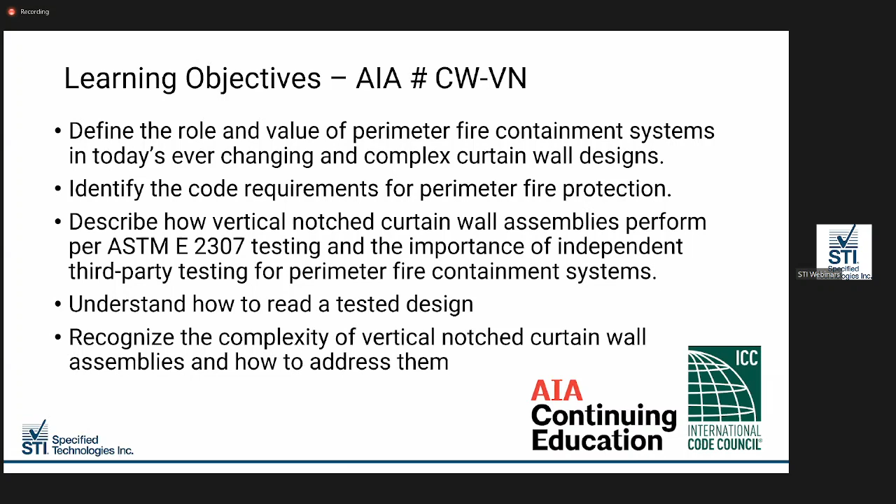And with that, I'd like to turn it over to our presenter today, Mr. Eric LaCroix. Welcome, Eric. Thank you so much, John. I'd like to welcome you to today's advanced curtain wall training and thank you for the opportunity to speak with you. As mentioned, my name is Eric LaCroix and I will be your presenter today. I'm the Director of Strategic Accounts for Specified Technologies Incorporated, overseeing the curtain wall division, and I'm considered the Firestop industry's curtain wall specialist. Just a little background before we begin.

STI is a privately held worldwide manufacturer founded in 1990 and is the technical leader in the firestop industry. STI's corporate headquarters are located in North America with regional offices in Europe, Middle East, Singapore, Latin America, India, and the Far East and China. We are the only manufacturer with 100% focus on the firestop industry, and our mission is simple: to provide the most innovative and cost-effective firestop solutions.

Today's presentation has been developed from overwhelming requests for the latest advancements in testing for vertical notch curtain wall systems and is designed to assist you in avoiding headaches and delays down the road that cost you money. We will have time at the end of today's presentation, as mentioned, to answer any questions you may have, so please feel free to ask.

Our discussion topics will cover the evolution of code consistency, the importance of testing for perimeter fire containment systems covering ASTM E2307 and the ISMA, in addition to understanding how to read tested systems. We'll also cover understanding the complexity of vertical notch curtain wall designs, focusing on both traditional galvanized backpan assemblies, as well as the newer galvanized valance backpan assemblies. We'll also provide an STI update, and again, we'll have time at the end for questions.

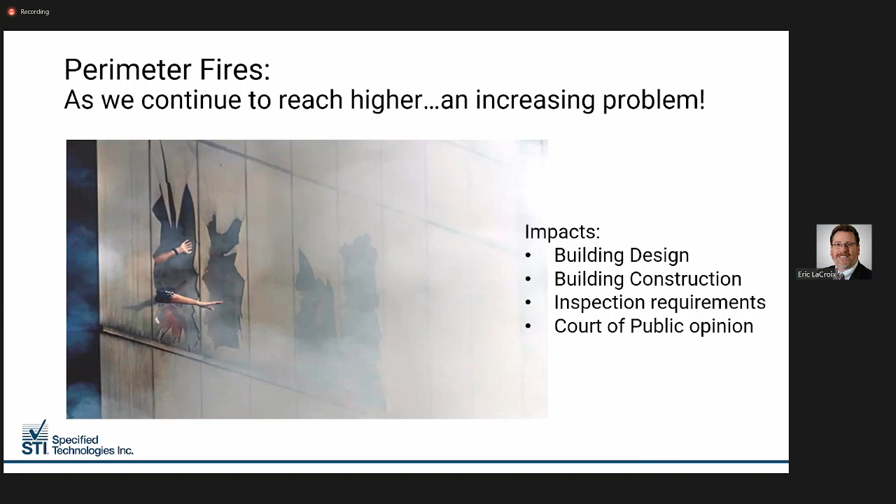The starting point is to always have a solid understanding of the code requirements. And the great news is the codes have finally established consistency, starting with the 2012 IBC and continuing with the adoption of the 2015 and 2018 IBC codes. State building codes have also been adopted, incorporating the IBC verbiage to supply a consistent message across the country.

Protection of the void created is mandatory in all building codes, period. The IBC documents specific language to outline the requirements and further eliminate confusion.

Section 715.4, exterior curtain wall floor intersection, states voids created at the intersection of the exterior curtain wall assemblies and the rated floor ceiling assemblies shall be sealed with an approved system, not materials with known fire resistance properties. These systems shall be securely installed, in other words mechanically fastened in place, because simply friction fitting the insulation and taping to the frame will not pass the test standard.

These systems must be tested in accordance with ASTM E2307, which we'll cover in detail shortly, and they are required to provide an F rating equal to that of the floor or roof deck itself. That is the code requirement.

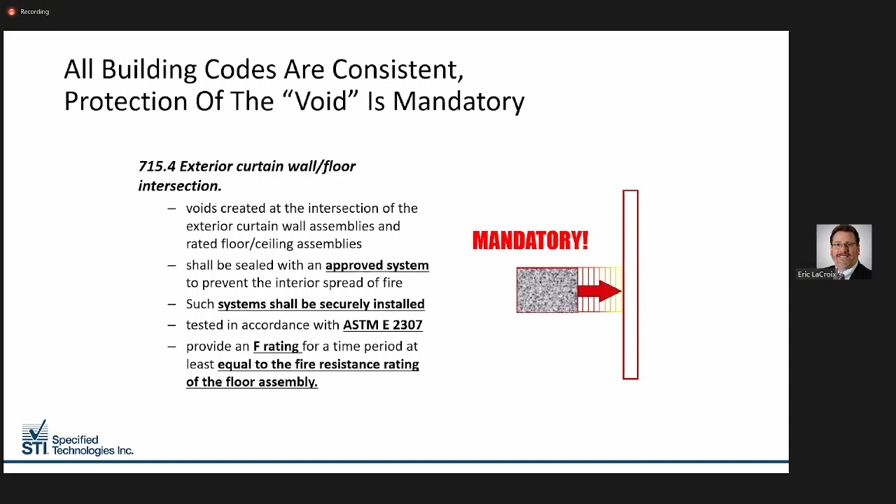In addition, Canada has finally adopted the ASTM E2307 requirements into the 2018 S115 Canadian Code, and the language has also been incorporated into the 2020 NBCC, which was targeted for release December of 2021. The release of all the updated codes has been delayed due to the COVID pandemic, so we are staying on top of the release of those codes on a monthly basis.

So let's discuss the importance of testing for perimeter fire containment systems, focusing on ASTM E2307 and the ISMA. And again, we'll also review how to read tested systems.

All perimeter fire containment systems are tested to ASTM E2307, which is the standard test method for determining fire resistance of perimeter fire containment systems using the intermediate scale multi-story test apparatus, commonly referred to as the ISMA. This is a very severe and critical test to pass, and it differs in three critical ways from how standard construction joints are tested.

First, this test is run between a rated floor or roof barrier and a non-rated exterior curtain wall assembly. Every other construction joint in the fire stop industry is tested between two rated barriers - a rated floor to a rated floor, a rated wall to a rated wall, a rated floor to a rated wall, and so on. This test requires a non-rated exterior wall to a rated barrier - a different test standard.

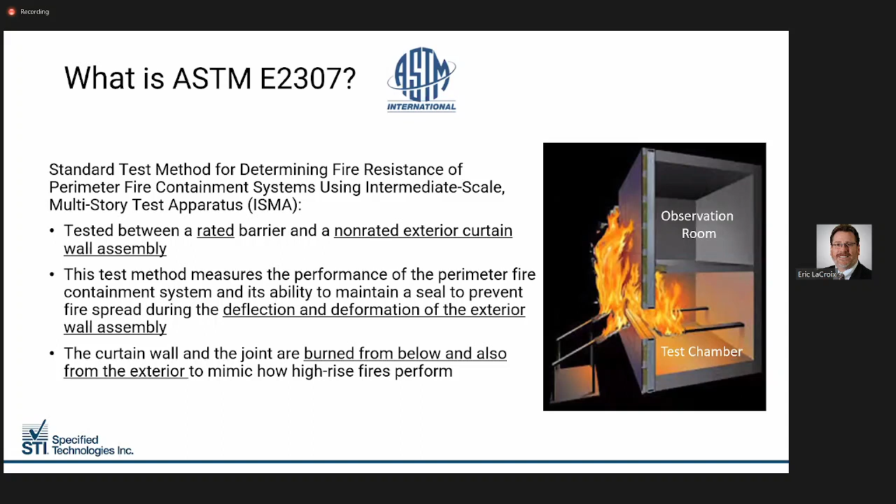Compartmentation is really nothing more than dividing space into smaller units through construction of rated boxes, designed to limit the spread of fire and toxic smoke and gases to their point of origin. This allows occupants to get out and first responders to get in, which is critical in fire protection for life safety.

But in curtain walls, structural integrity is also critical, because if the wall comes off the building, the joint goes with it. We must protect the components of a non-rated curtain wall system as long as possible to be successful.

The fire will attack any unsealed voids at the floor line on the interior side while breaking out the vision glass on the floor below. The fire will then attack the framing system and spandrel or closure panels from dissimilar planes, from both the interior as well as the exterior of the building.

Combustibles on the floor will ignite, occupants will perish due to smoke inhalation, and in the worst case scenario, both compartmentation and lives are lost.

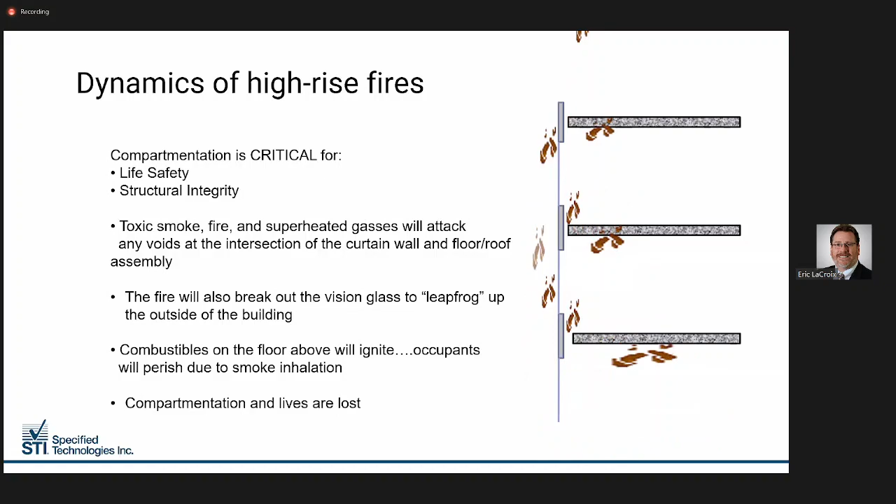So let's take an in-depth look at the ASTM E2307 test requirements and the ISMA.

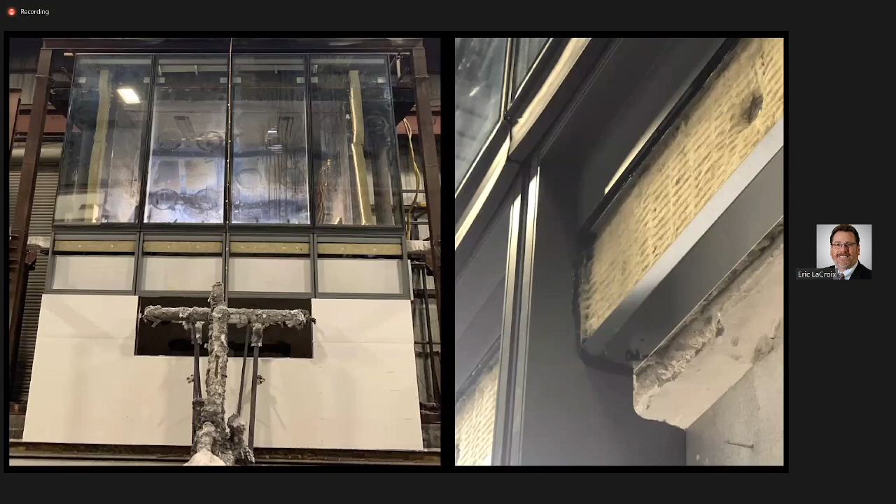Here we can see a recent full-scale ASTM E2307 test on the ISMA. On the left, you can see the size and scope of the test that was run, while on the right, you can see the galvanized back pan assembly in relation to the floor slab itself.

And here you can see the internal burner igniting at full intensity at the very beginning, at the start of the test.

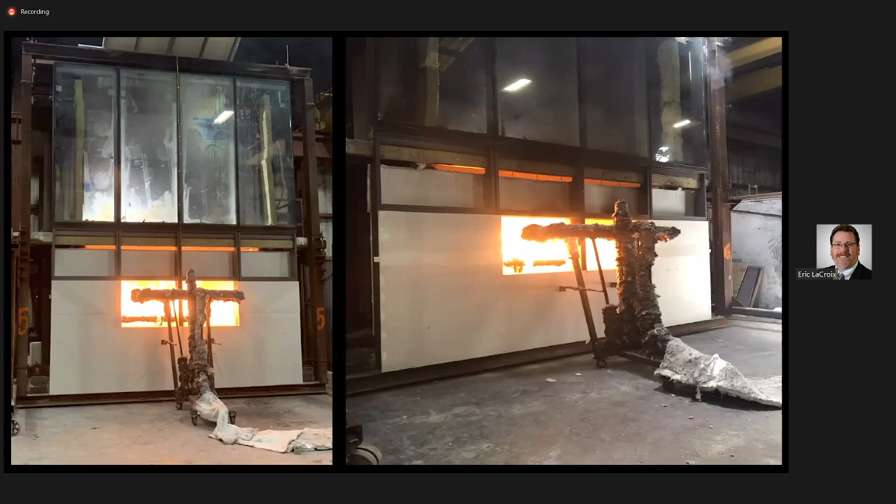Roughly 5 minutes into the test, the external burner is lit, and this will focus the flames and heat on the exterior of the wall assembly to replicate the performance of high-rise fires.

Here you can see the start of both the internal and external burners merging and gaining in intensity in only a few minutes of the test.

Here you can see the test in full force. We are starting to see critical components of the wall system start to fatigue rapidly, and it is not uncommon to see flame plumes of up to 10 to 12 feet during the test.

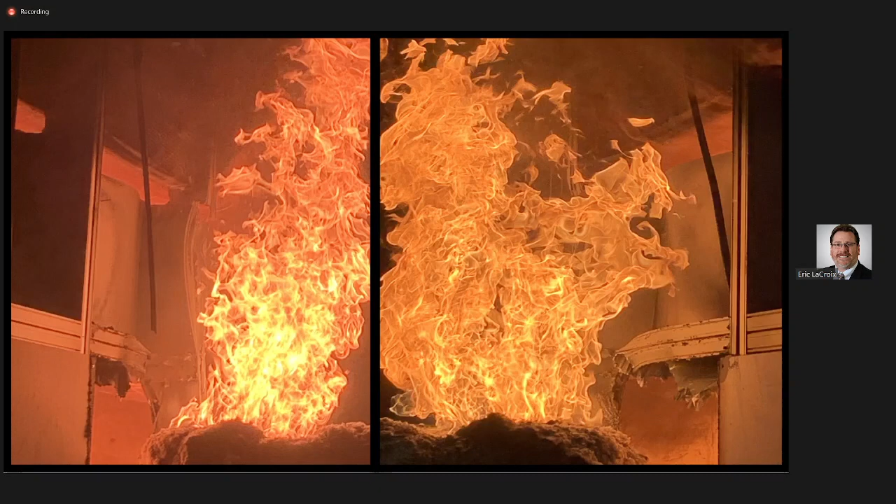Here we can see the vertical mullions on the left are bowing, twisting, and giving way, while on the right, you can see the horizontal transom below the floor line has melted out. This is due to the severity of the heat and flames during the 2307 test.

And with the vertical and horizontal framing compromised, the thermal expansion of the backpan assembly comes into play, and the issues with galvanized backpan assemblies under fire conditions become obvious.

On the pic on the left, you can see the backpan assembly is deflecting and warping as the framing weakens. Note the lower leg of the backpan assembly pulling away from the mineral wool weld pin to the backpan itself.

On the right, you can see how the flames on dissimilar planes attack the assembly. The loss of the framing, the loss of critical fasteners, and the warping and twisting of the assembly itself will cause the backpan to lose integrity and eventually fall out of the framing system.

And here you can see at the end of a 3-hour test, note the assembly is glowing red hot. On the right, we can see the impact to the galvanized backpan assembly as it is twisted, warped, and stressed the fasteners, causing them to fail.

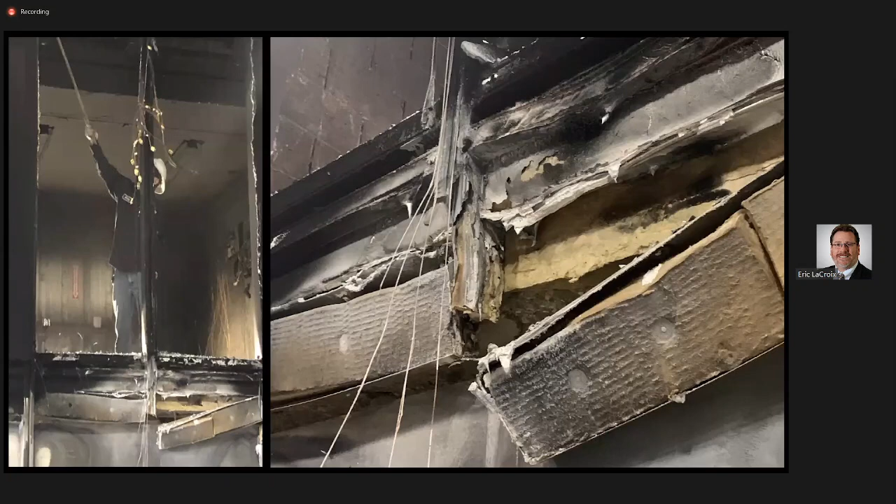And here you can see the impact, again, of the 2307 test standard on the wall assembly itself.

And although it looks pretty bad on the exterior of the building, the perimeter fire containment system performed as designed to prevent the interior spread of fire per the IBC 715.4 requirements, keeping critical components of the wall itself intact for a longer period of time.

Remember, perimeter containment requires the extension of the rated floor to the non-rated exterior wall. The perimeter fire containment system, the sealing of the perimeter joint, and the extension of the rated floor all provide structural protection and maximize the integrity of the wall system at the floor line itself.

So once the test is successful per the ASTM E2307 requirements, a tested design is listed and published.

Both UL and Intertek test to the same ASTM E2307 standard, but they have unique aspects to both labs. UL has some advantages for specific designs that they run, including the ISMA configuration for backpans, anchors tested in designs, as well as realistic movement requirements.

At Intertek, they have advantages for their specific designs as well. All vision glass systems, hybrid window walls, and wider mullion spacing are advantages at that lab. STI utilizes the best aspects of both labs for tested designs that are proven under real-world fire conditions.

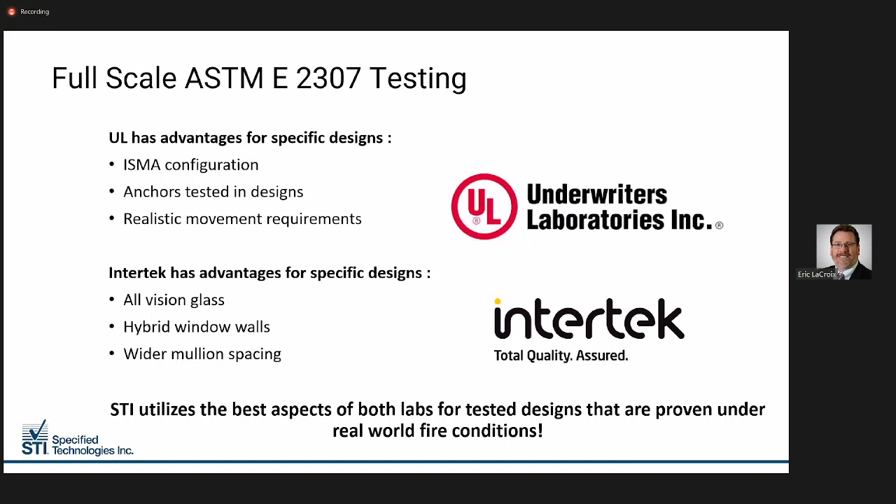Well, that's great, Eric, but what exactly does a system mean and how do I read them? Well, that's a great question. The good news is when it comes to perimeter fire containment systems, they are easy to understand.

At UL, tests are broken into a set of alpha characters and a set of numeric components.

The first set of alpha characters must be CW. Well, what do you think that means? Right, CW stands for a perimeter fire containment system tested for ASTM E2307 on the ISMA.

The second set of alpha characters will be either an S or a D, referencing either a static or dynamic design. Please note that in the perimeter fire containment world, static systems are completely acceptable.

UL historically referenced movement as compression extension, like in rated construction joints, like head of wall. As curtain walls do not move like that, they developed a cycling method listing vertical shear movement, like wind sway and thermal expansion, which is much more applicable to perimeter fire barrier systems.

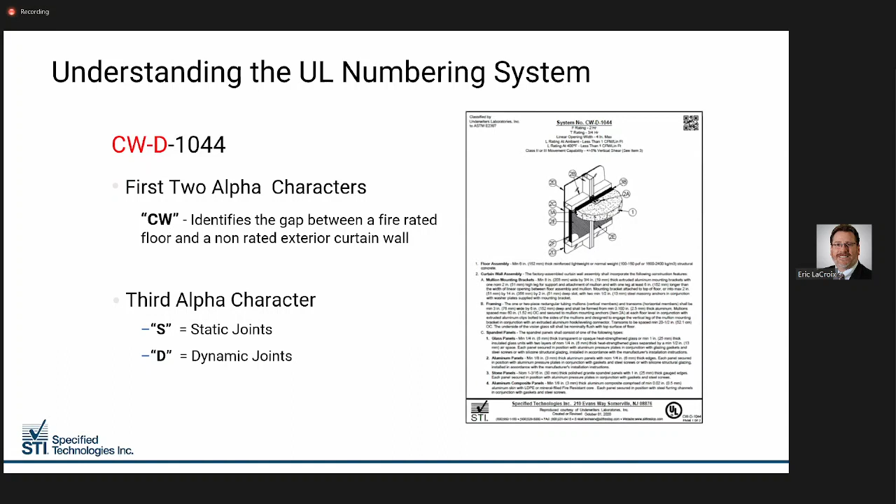The next section will list the numeric component. The first number will always reference the width of the joint. The 0 series are for joints up to 2 inch, the 1000 series are for joints up to 6 inch, and the 2000 series are for joints up to 12 inch. Now, it doesn't mean that specific test has that maximum joint width, it means that system will be found in that joint width range. The last 3 numeric components list the test number in a series.

So CWD 1044 is the 44th test run for a perimeter fire containment system for a joint width in the max 6 inch range, as tested per ASTM E2307 on the ISMA. It's that simple.

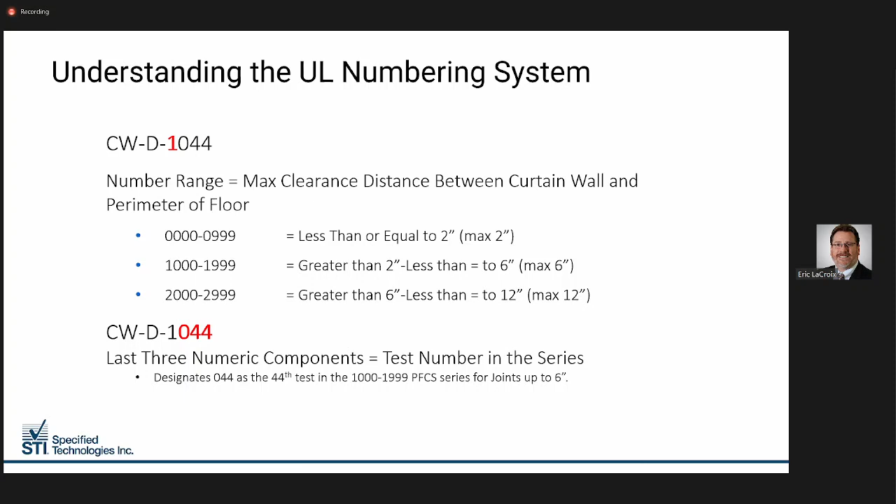Well, at Intertek the numbering system is a little different. Numbering system STI BPF 18007 is broken down as follows: STI is the manufacturer identifier. BPF identifies it's a barrier, perimeter fire tested per ASTM E2307 requirements on the ISMA. The 180 is the hourly rating in minutes, so this would be a 3-hour F rating. And the 07 identifies this is the 7th system in this grouping. Again, it's that simple.

So what's the big deal with ASTM E2307 published tested designs? Well, there's absolutely many. First and foremost, published systems meet the code requirements outlined in the definition section of the building codes and are subjected to follow-up services by the labs.

Listed is defined in the code under Chapter 2 as equipment, materials, products, or services included in a list published by an organization acceptable to the building official and concerned with the evaluation of products or services, that maintains periodic inspection of production of listed equipment or materials, or periodic evaluation of services, whose listing states either that the equipment, material, product, or service meets identified standards or has been tested and found suitable for a specified purpose.

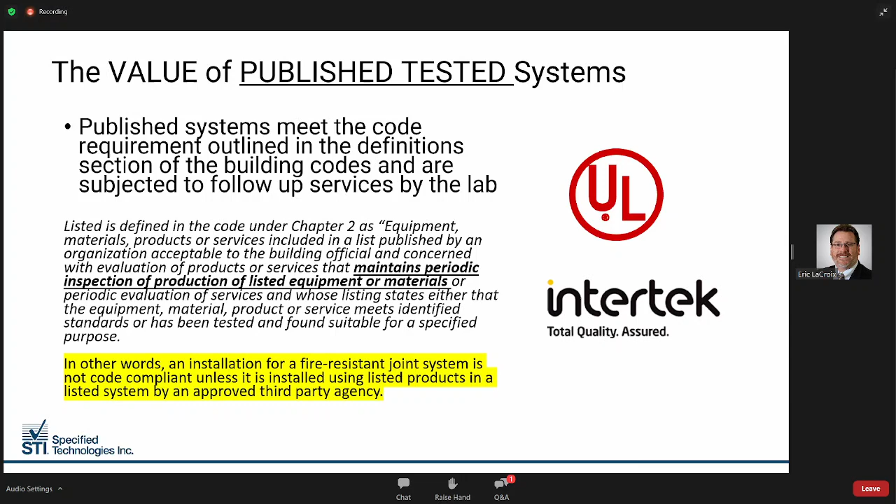In other words, the installation for a fire-resistant joint system is not code compliant unless it is installed using listed products in a listed system by an approved third-party agency.

Also, because of this, published system designs are well recognized and respected by architects and inspectors. They limit job delays and stoppages by eliminating concerns, which saves money by keeping the project on or ahead of schedule. It limits liability and exposure to all parties involved. But for us, the real reason is tested published designs work in real fire conditions.

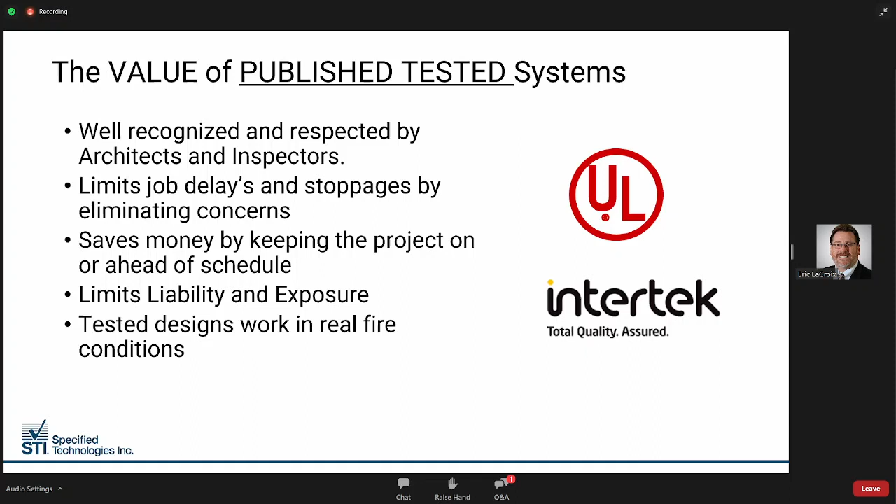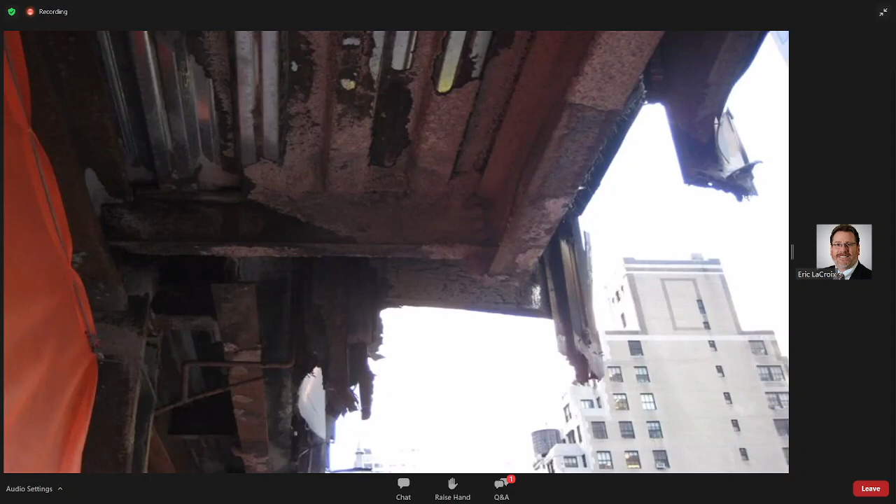When you go on the floor where the fire broke out, this is exactly what you'll see. The failure of the wall system is exactly what will happen: the aluminum framing, the vision glass, and the spandrel panels are completely gone. However, when you go on the floor above, the aluminum framing is all intact, the anchor is protected, and the void is completely sealed. The perimeter fire containment system did its job.

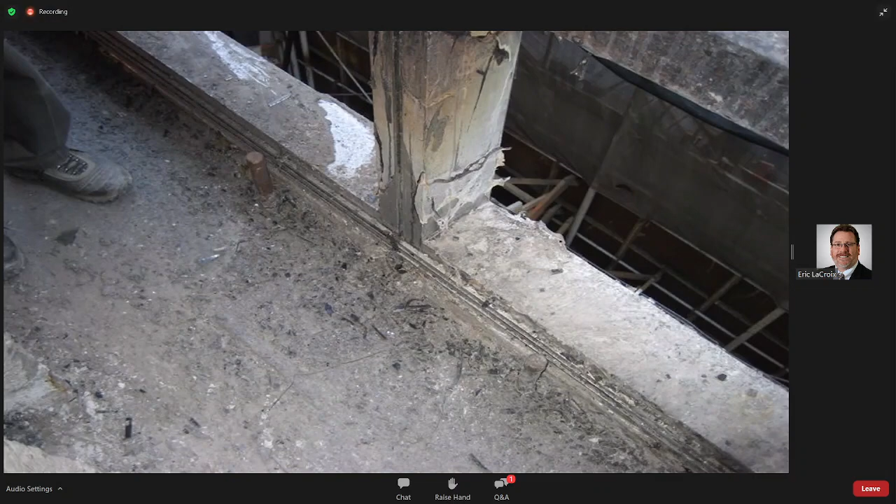The next section focuses on understanding the complexity of vertical notch curtain wall designs, incorporating both traditional galvanized backpan assemblies and the newer galvanized cutting-edge valance backpan assembly designs.

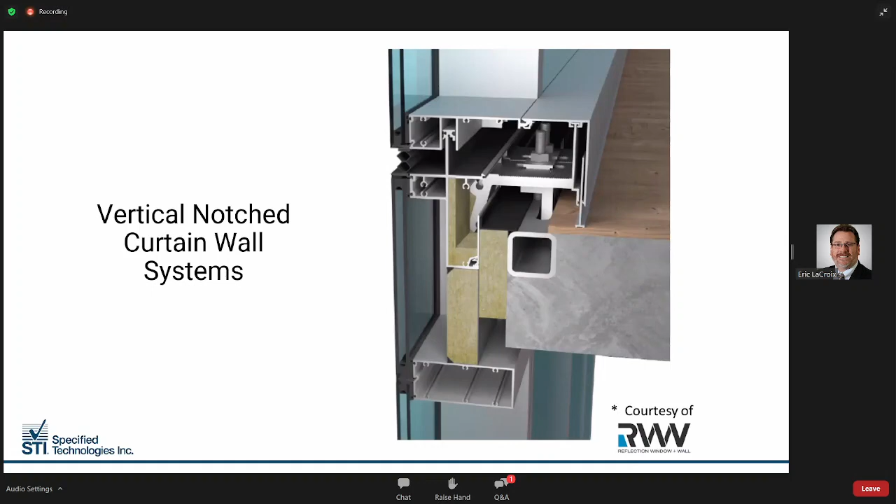So the starting point is to understand what is a vertical notch curtain wall system and why would you use one.

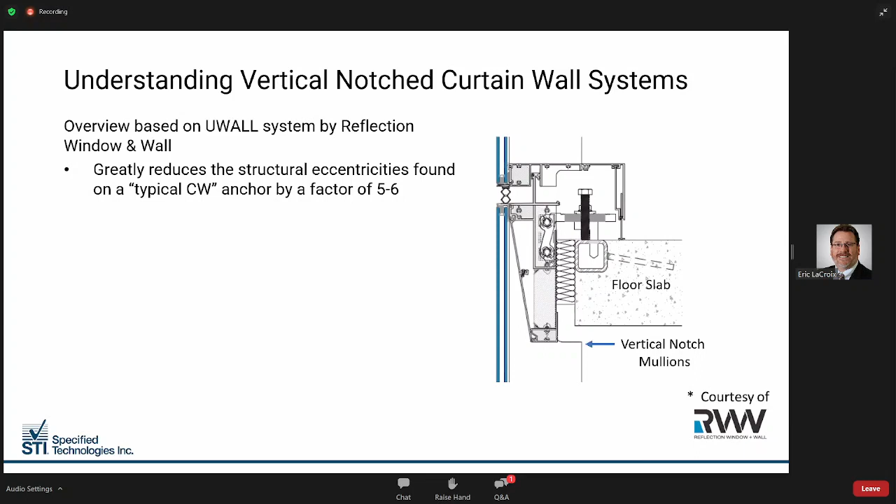Using an overview based on the U-Wall system by Reflection Window and Wall, their vertical notch curtain wall system design offers the following advantages. It greatly reduces the structural eccentricities found on a typical curtain wall anchor by a factor of 5 to 6. The design unifies the anchor components into the panel directly, so the unit acts as the anchor. The result is the U-Wall system can be installed with about half the crew size in less than half the time of a typical system, because the unit is the anchor. And last, the vertical notch of the mullion brings the system's face of glass closer to the slab edge, which allows for infinite design flexibility on the interior. Their patented adjustable interior trim also allows you to perfectly finish any floor you want, without the unsightly caulk joints normally occurred.

So here we can take a look at the vertical notch curtain wall system. First of all, the system allows for a 1 or 2-piece framing.

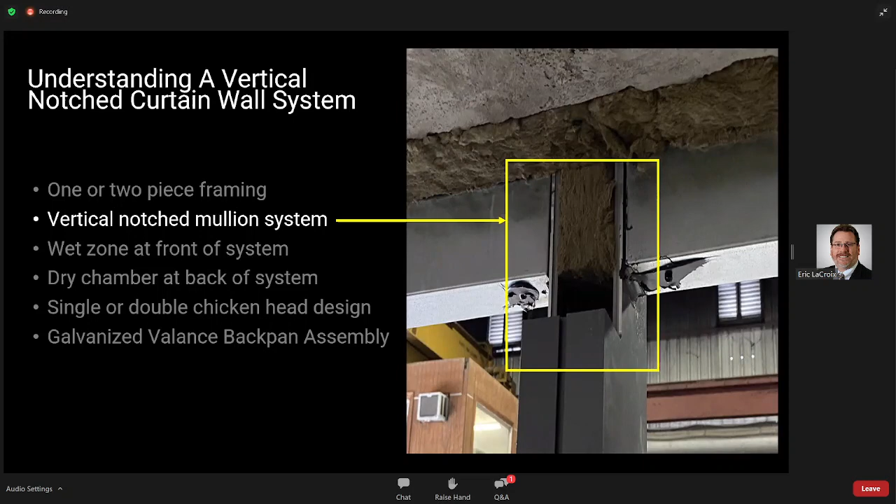And here you can see the vertical notch curtain wall frame clearly at the back of the system. Note it is completely open and it will absolutely cause serious issues quickly if not protected properly.

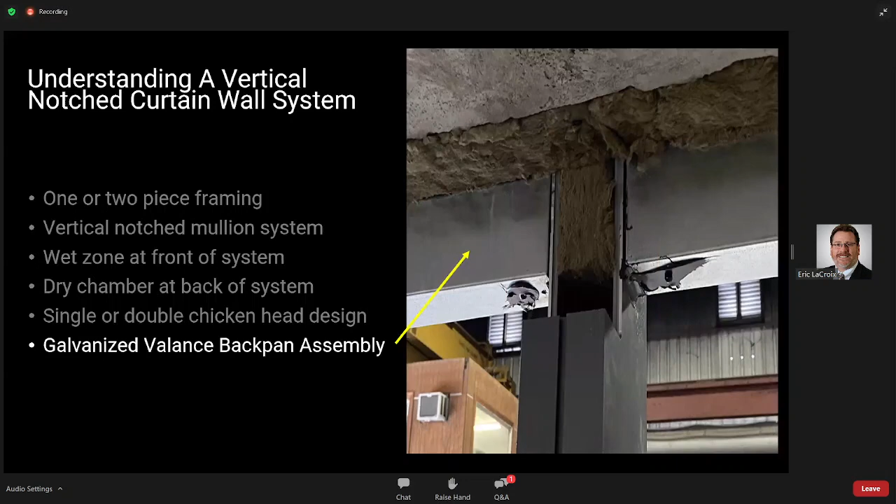It allows for both a wet zone and a dry chamber within the mullions. And the system also allows for a single or double chicken head. And last, you can see the galvanized backpan assembly. This is what's known as a valance backpan assembly, which is absolutely on the cutting edge of how these designs are fabricated.

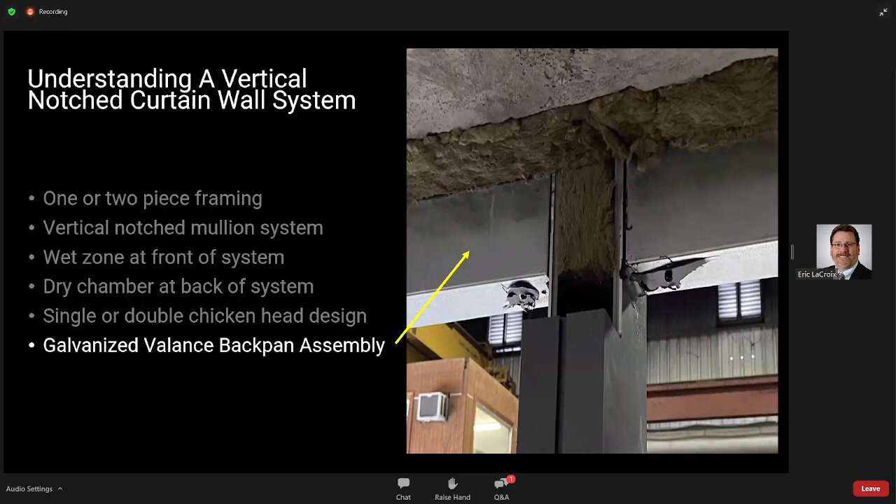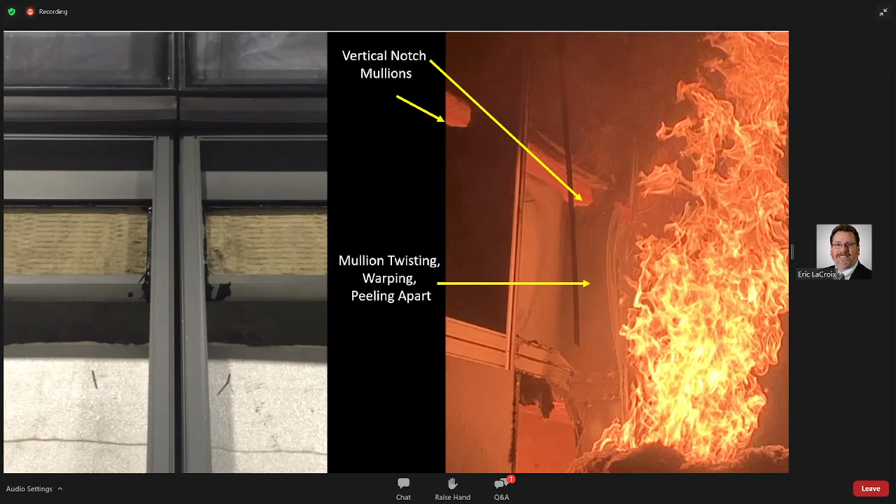And again, here you can see the ASTM E2307 full impact to the framing system in the before and after pictures. Note the mineral wool insulation that is installed within the framing system during fabrication and on site has performed as designed and has protected the interior spread of fire for a full 3 hours.

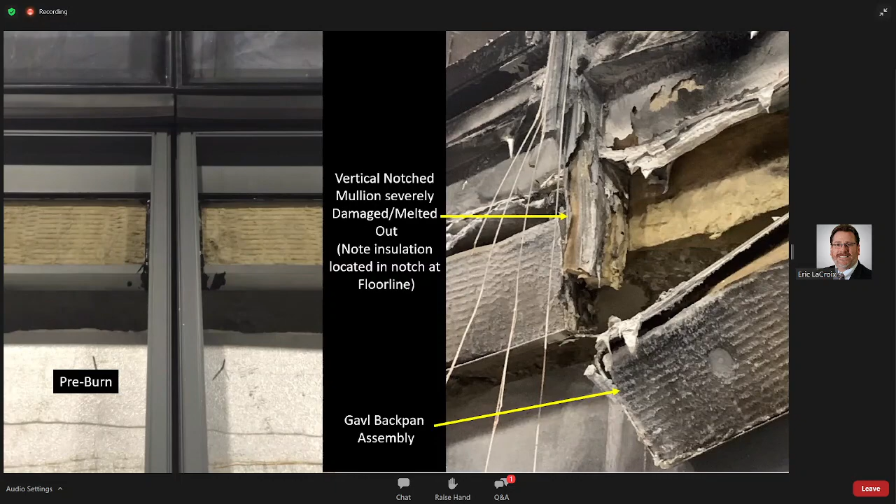And again, here is another pic to illustrate the 2307 test impact to the vertical notch curtain wall system, incorporating a balanced galvanized backpan assembly. Note the mineral wool insulation has been installed in the vertical notch area and in the framing itself has performed as designed. Without the insulation in the framing, the test would absolutely fail.

Remember, a successful perimeter fire containment system stops the interior spread of fire and provides protection by keeping the wall and the window system intact for a longer period of time. If the wall comes off, the joint goes with it.

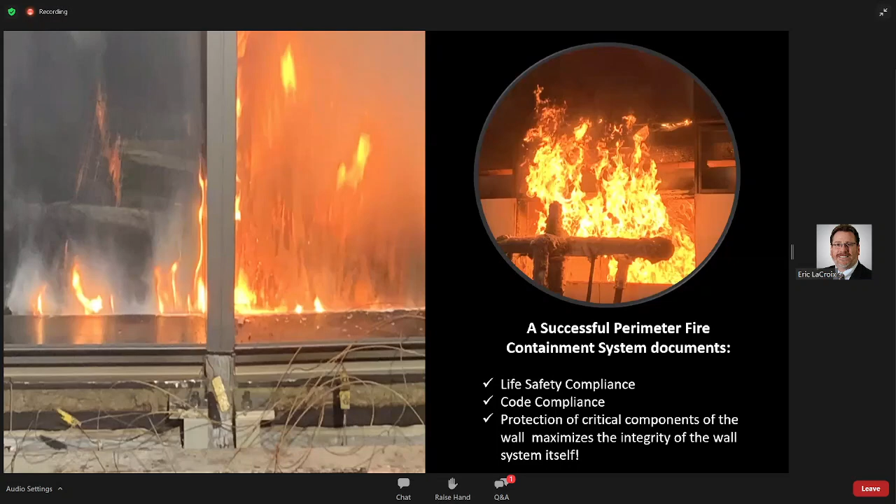So galvanized backpan assemblies make an already difficult condition even harder. The backpan itself is a critical condition that must be addressed due to their complex performance in various conditions.

But don't take our word for it. Let's look at UL's stance from 2011. UL documented their concerns about engineered judgments being issued for perimeter fire containment systems incorporating steel backpans, as only one manufacturer invested in the development of proven, tested, published designs.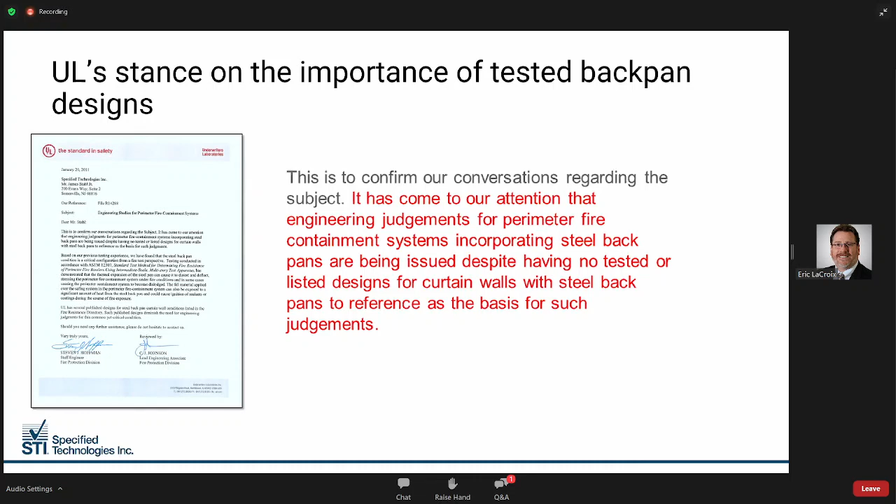It has come to UL's attention that engineering judgments for perimeter fire containment systems incorporating steel backpans are being issued despite having no tested or listed designs for curtain walls with steel backpans to reference as the basis for such judgments. Based on our previous testing experience, we have found that the steel backpan condition is a critical configuration from a test perspective.

Testing conducted in accordance with ASTM E2307 has demonstrated that the thermal expansion of the steel pan can cause it to distort and deflect, stressing the perimeter fire containment system under fire conditions, and in some cases, causing the perimeter containment system to become dislodged.

Also, the fill material, the fire stop spray, applied over the safing system in the perimeter fire containment system can also be exposed to a significant amount of heat from the steel backpan and could cause ignition of the sealants or coatings during the course of the fire exposure.

Again, this is another reason why published systems are critical, because they are subjected to follow-up services from the labs.

The issue with galvanized backpans are that they twist, buckle, and warp due to the thermal expansion of the steel. Most refer to this movement and deflection as oil canning. This is eliminated with the use of a stiffener at the floor line when the transom is raised off the slab.

If the system requires a stiffener at the floor line and one is not installed, the deflection of the pan can tear the spandrel insulation apart in the assembly and dislodge the packing material at the floor line, resulting in failure.

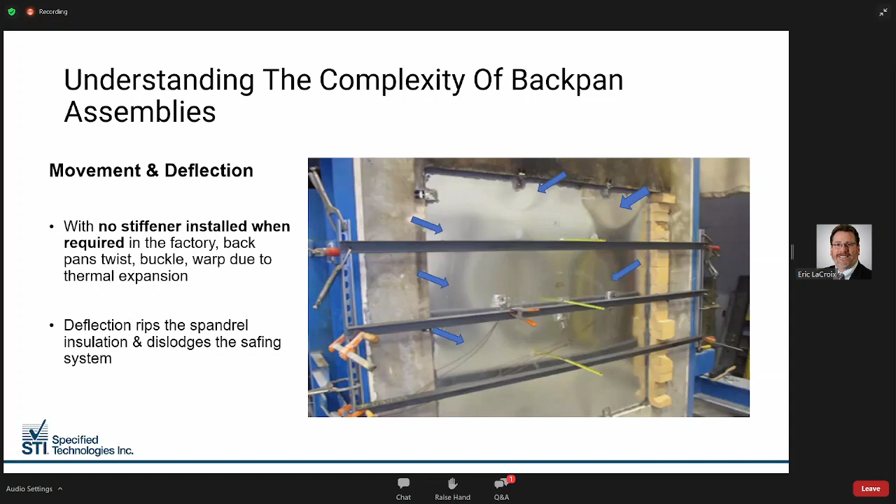And here we're going to show you the results of a raised transom design incorporating a heavy gauge backpan for a raised transom condition with no stiffener included. This was from a project years back where the designers and the fabricators wanted to use a heavier gauge backpan and felt that it would handle the deflection.

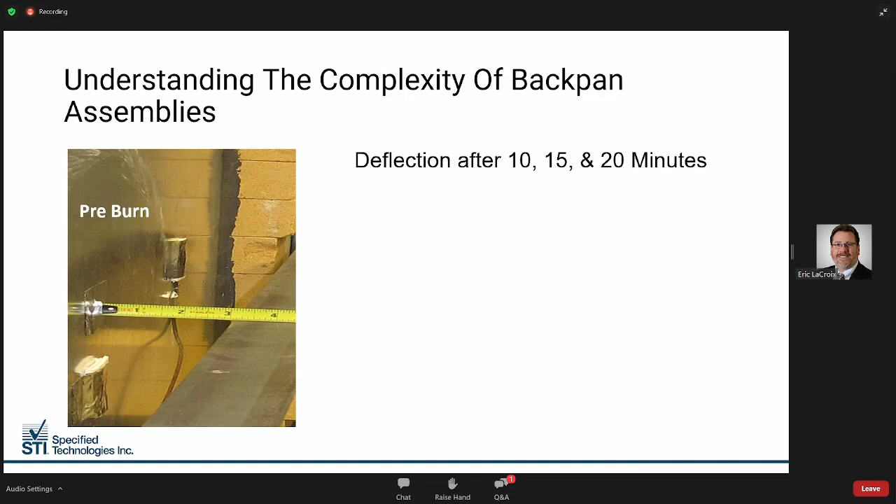And so we actually tested it for them. So here you can see the results, with a joint being set at 3 inches. At 10 minutes into the test, the joint had deflected to 2.5 inches.

At 15 minutes, the joint was 2 1/4 inches. At 20 minutes, the joint had deflected to 1 3/4 of an inch. The test was stopped at 20 minutes due to the oil canning of the pan itself over various areas, as we could tell there was interior damage happening.

When the assembly was removed from the furnace, the back pan fell out. This would be an example of back pan units failing, commonly referred to as panel shedding.

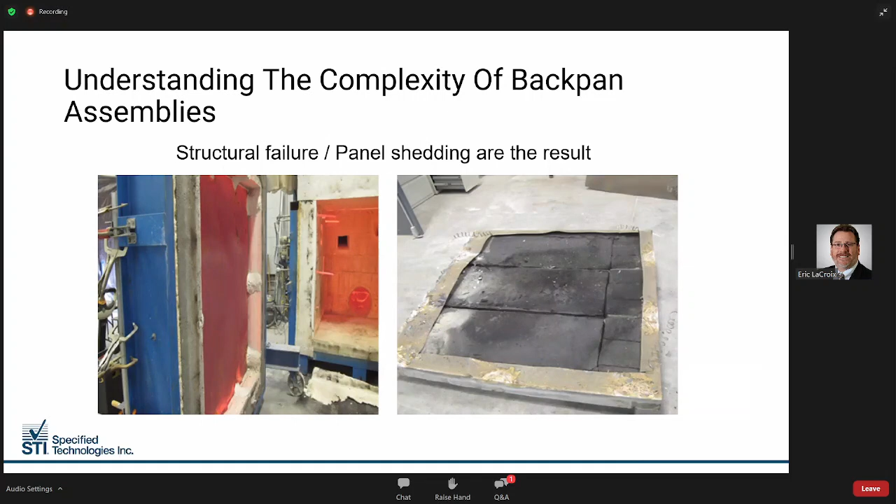Here's another example of the complexity of the back pan assemblies, looking at the seams that opened up in the curtain wall insulation that was weld pinned to the pan itself. The transfer of heat through the seams caused the pan to deflect, which caused the seams to open up wider, which in turn caused the pan to deflect more. This is a never-ending cycle that eventually will lead to the assembly's failure.

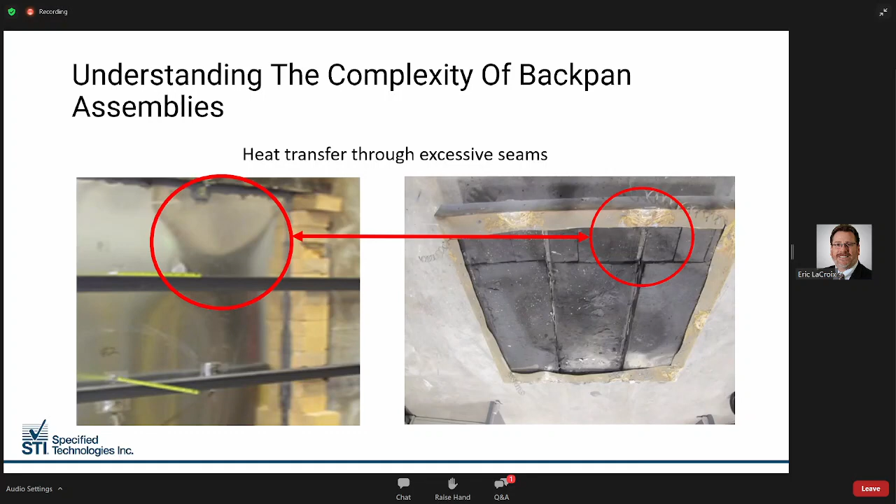So let's take a look at the requirements for galvanized backpan assemblies in today's modern configurations.

In general, backpan assemblies must be a minimum 22 gauge galvanized steel located at the back of the system, which is the most common application, or towards the front of the system, often referred to as a wet zone. Backpan assemblies must be mechanically fastened to the curtain wall framing with steel screws spaced max 8 to 12 inches on center. Testing is available allowing the backpan to be recessed a max 1 inch from the back of the system. Certified curtain wall spandrel insulation is mechanically fastened to the galvanized backpan with cup head weld pins spaced max 12 inches on center.

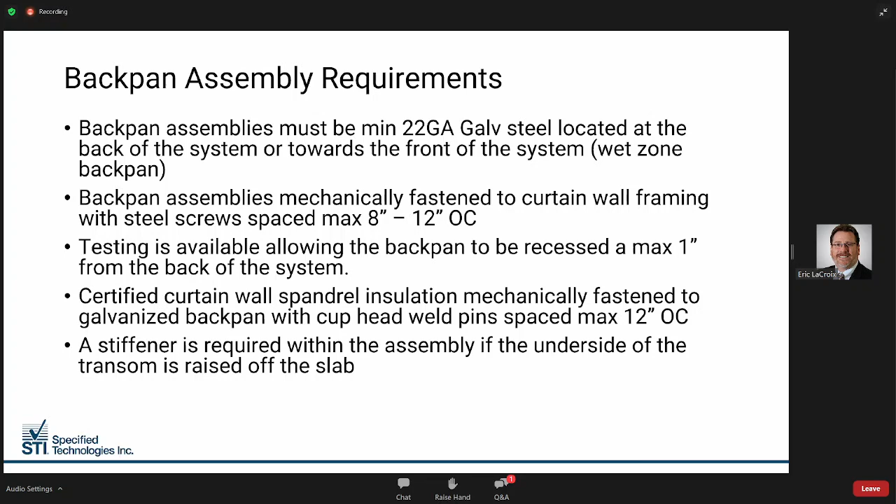And last, a stiffener is required within the assembly if the underside of the transom is raised off the floor slab.

So let's take a look at a couple key areas. Again, certified curtain wall spandrel insulation must be secured to the galvanized backpan assembly, max 12 inches on center. This is generally done with either cup head weld pins or steel weld pins with clinch shields. If a seam is allowed in the tested design, a fastener is required max 6 inches from the seam, and a minimum of 2 fasteners are required per section.

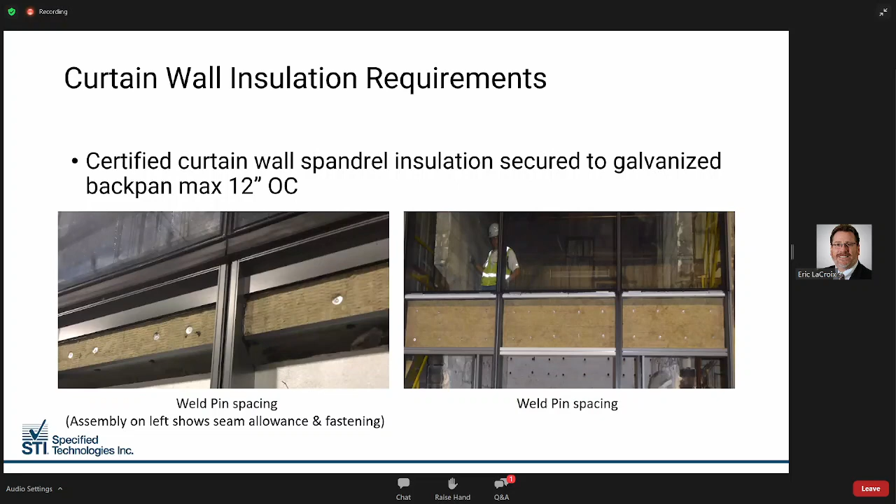So let's discuss one of the most overlooked requirements of a backpan assembly: the stiffener. Stiffeners are required for all designs if the transom or sill is raised off the floor slab. There are no tested designs omitting this critical component. Here's an example of a raised transom design with a minimum 22 gauge galvanized stiffener easily tack welded to the pan during fabrication in the shop.

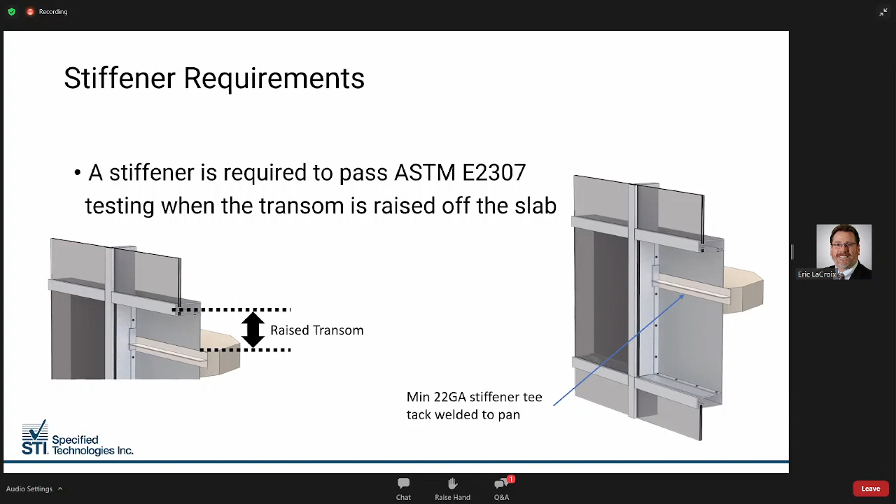A common condition that still occurs but results in major headaches, delays, and costs is when a required stiffener is not installed in the shop during fabrication. In the past, the units would have to be torn apart or the project would have to accept a cold smoke seal for the rating on the perimeter, both of which really aren't realistic.

But please note that there is a tested design now to address this common condition easily, by allowing the stiffener to be mechanically fastened on the void side while the units are hung, or during the fire stopping of the void itself.

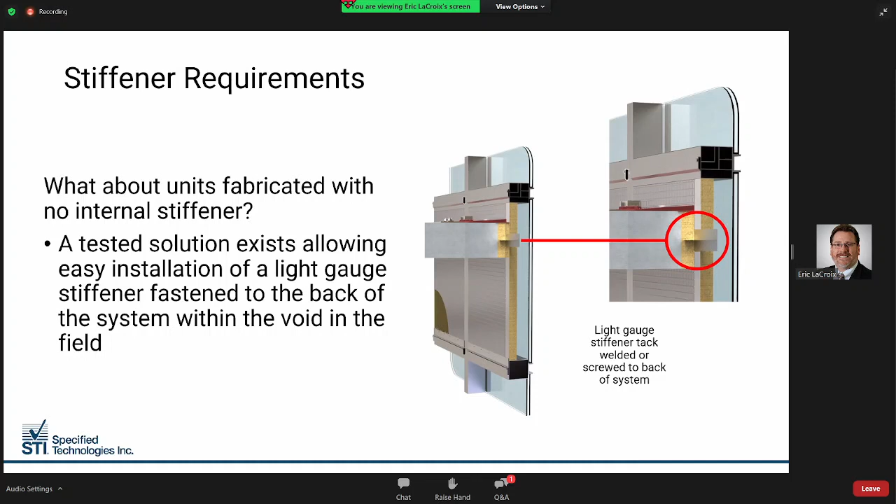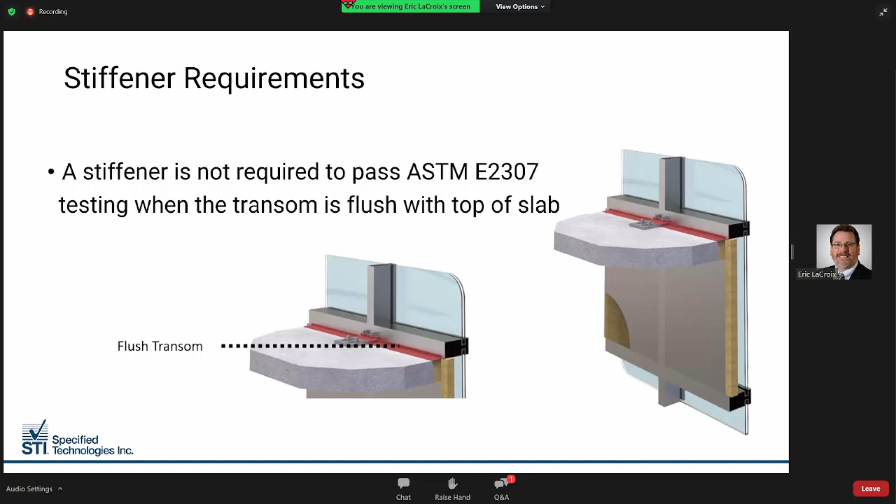Please note that a stiffener is not required to pass the ASTM E2307 testing when the transom is flush with the top of the slab in specific tested designs for back pan assemblies. Also note a stiffener may not be required to pass the standard when the transom or the extrusion is recessed below the slab in a specific test.

It is always recommended as best practice to always confirm the requirements of the tested design that either you're using or that engineering judgments are being written off of.

So let's discuss the traditional galvanized back pan assemblies in general. Here you can see the back pan assembly being dropped into the units in the shop. The units are then mechanically fastened to the framing per the system requirements.

Some advanced high-performance designs have been tested to address the continuous gap that many fabrication companies use. In the pic on the far right, you can see the gap is treated with standard all-weather sealant at the

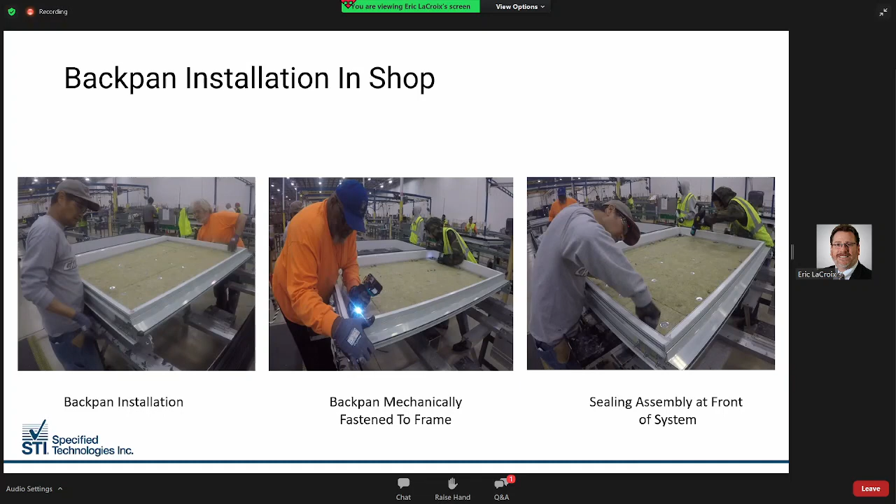front of the system during fabrication, and nothing additional is needed. In the image on the left, we see the assembly being ready to be tested. Note the spandrel insulation well pinned to the galvanized back pan assembly. On the right, we added an optional aluminum shadow box so that you can see how it would look with a clear spandrel panel or all vision glass panel. The lower area in blue references the vision glass area.

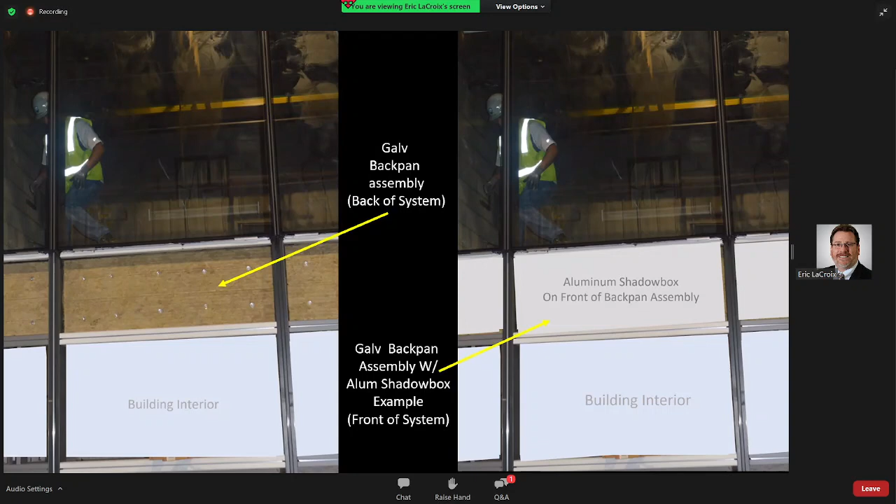So let's discuss the growing use of what is known as valance back pan assemblies. These have been developed and used to replace non-effective all-vision glass assemblies that have become popular in many of today's complex projects being designed.

On the left, we see the positioning of the valance back pan assembly designed to provide the look of all vision glass. On the right, we added a shadow box to reference how it would look in contrast with the building interior.

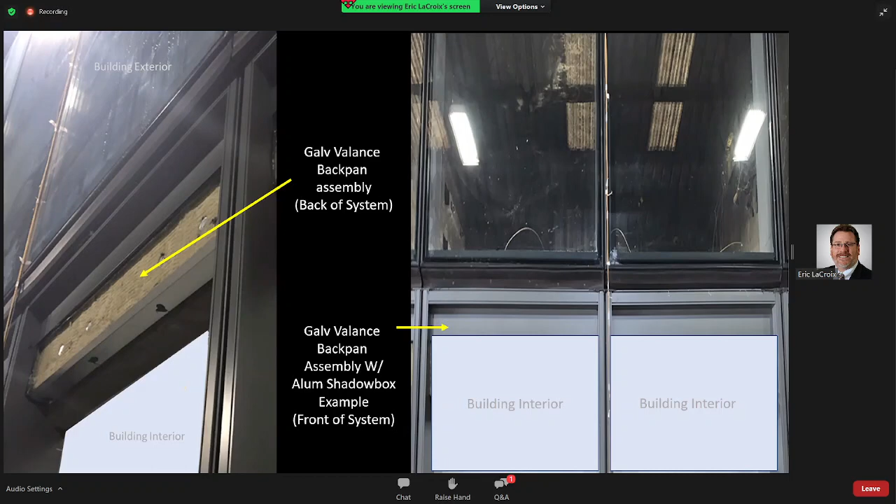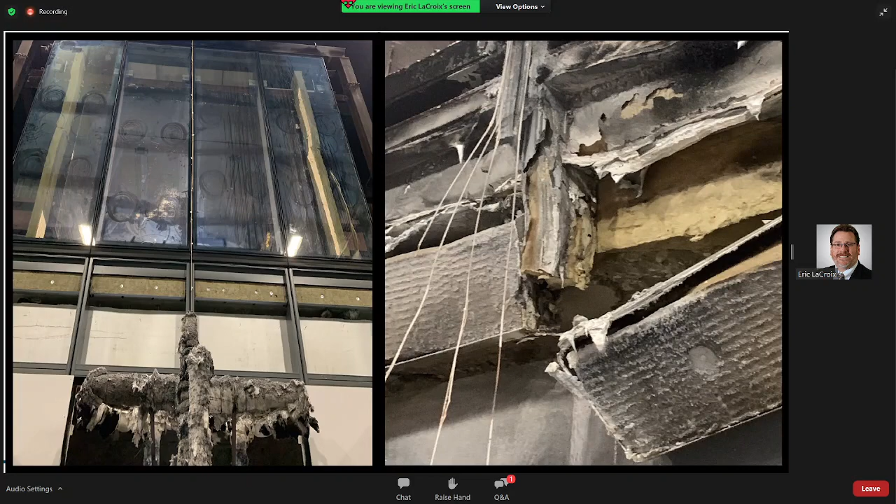In closing, code requirements are mandatory. All voids created at the intersection of a non-rated exterior curtain wall and a rated floor or a roof slab must be protected to prevent the interior spread of fire per IBC 715.4 requirements.

Vertical notch curtain wall systems present unique challenges and require specific protection. Real-world, published, tested designs exist for these unique wall systems and should be used over non-tested EJs or unpublished solutions. The galvanized backpan assembly must be considered as a critical part of the system itself, and any EJ should be closely reviewed to ensure the manufacturer of choice has tested vertical notch curtain wall systems incorporating galvanized backpan assemblies.

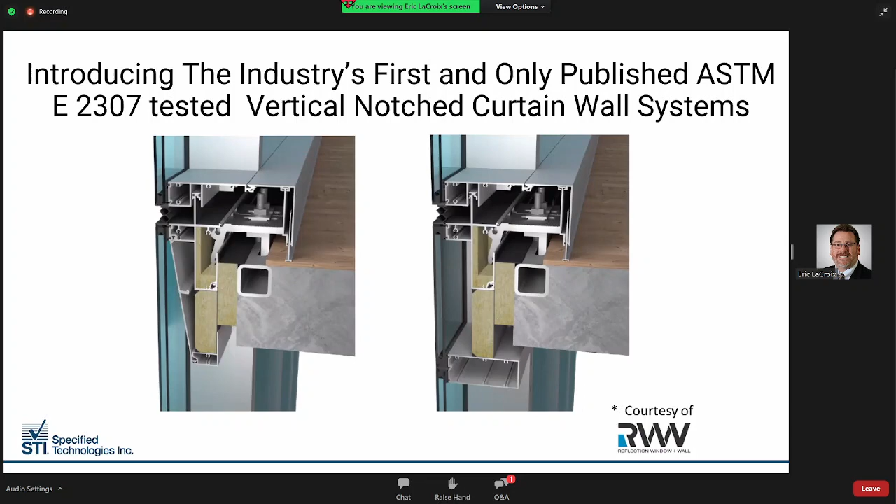STI is proud to introduce the industry's first and only published ASTM E2307 full-scale test for vertical notch curtain wall systems. STI/BPF-180-02 offers many of the industry's first, including the first and only published ASTM E2307 full-scale test, a maximum 3-hour F rating. System protects the vertical notch mullions, the anchor pocket, and the stack joint within the design.

Another key feature is it offers a minimum 40.5 on center mullion spacing to address many of today's wider mullion spacing requirements. It incorporates the proprietary Tomahawk anchor system for ease of install.

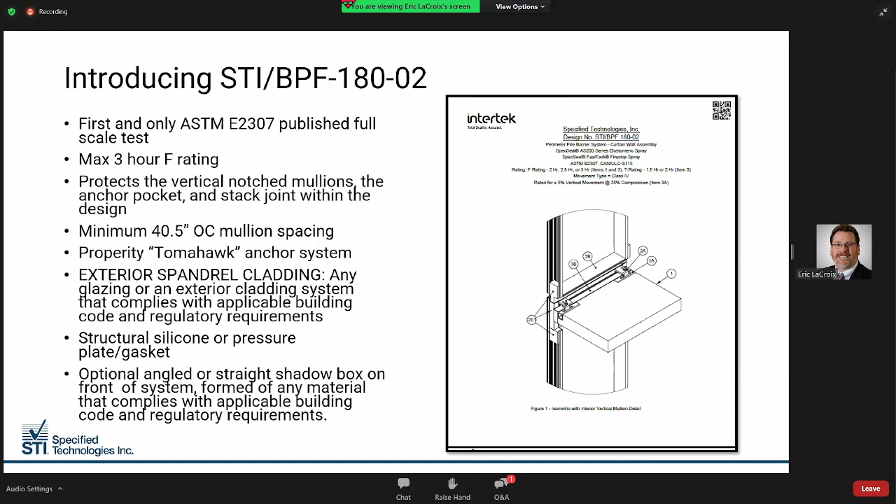And it also allows for any glazing or an exterior cladding system which complies with applicable building code and regulatory requirements. Allows options for structural silicone or pressure plate and gasket to be used. And lastly, offers an optional angled or straight shadow box on the front of the system formed of any material that complies with applicable building code or regulatory requirements.

More firsts in the industry. We offer the first valance backpan assembly tested with multiple options. Here you can see we have an option for just the backpan assembly itself with no transom below the floor slab, only the bent leg of the backpan assembly. It also allows for both captured or kiss framing.

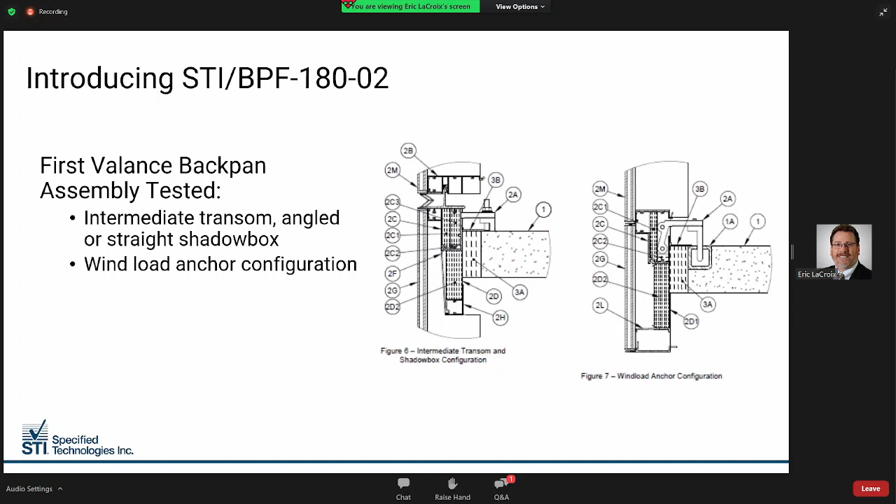And last, it allows for an intermediate transom with an optional angled or straight shadow box. And for the first time ever, it addresses a wind load anchor configuration, which has become very critical in many jurisdictions around the country.

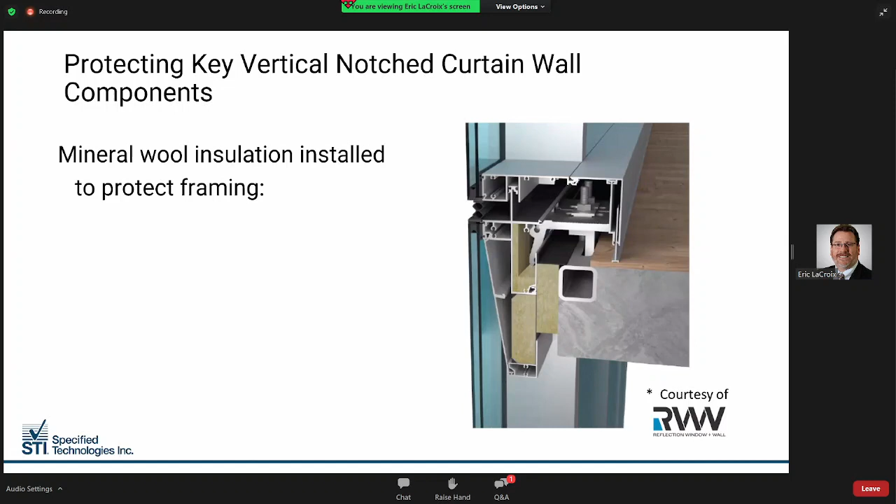And here you can see the mineral wool has been incorporated into key areas of the framing system during fabrication and on site. Here you can see that the anchor head cavity at the front and the anchor head cavity on the underside, as well as the space between the anchor cavities, are protected.

Here you see a minimum 2-inch, 8-pound faced or unfaced spandrel insulation that has been fastened to the back pan with cup head weld pin spaced max 12 inches on center, and multiple seams are allowed in the tested design. A minimum 6-inch deep 4 PCF mineral wool insulation is compressed minimum 25%, with the grains running vertically in the void, flush with the top of the slab.

And to complete the installation, the final step is the installation of SpecSeal firestop sprays installed per the system requirements.

Again, here you can see the importance of the insulation in the anchor head cavity in the front of the system and in the vertical notch mullions at the end of the 3-hour burn. The installation of proper mineral wool is critical in the performance of any tested design for vertical notch systems.

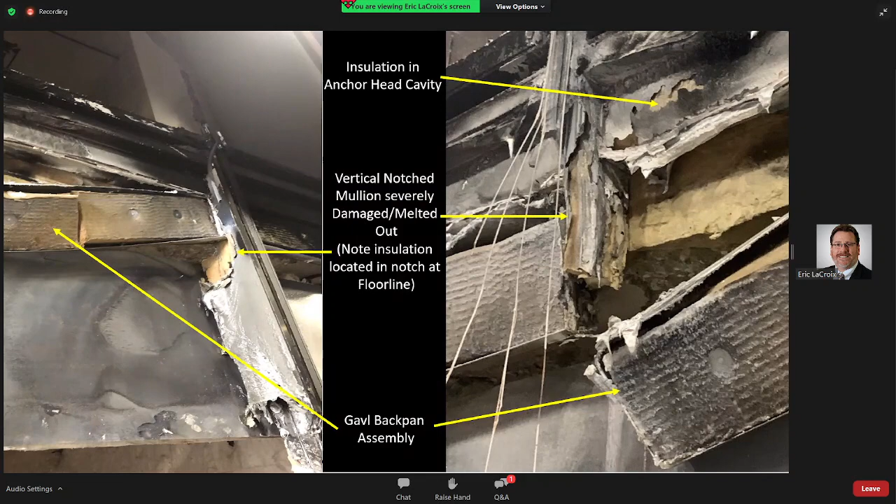We want you to know that you're not alone. STI is your global firestop solution partner. STI owns over 60% of the perimeter fire containment systems tested at UL, with dozens more at Intertek. But having the greatest number of systems isn't enough.

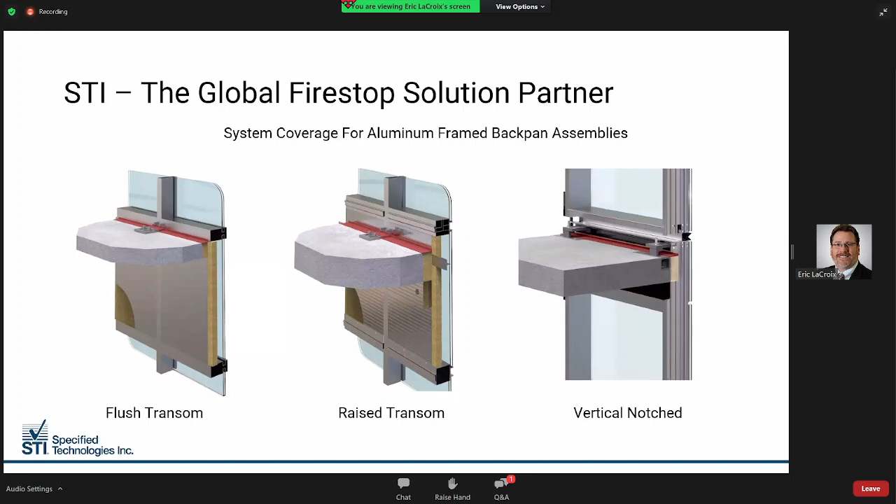It's all about real-world testing. STI has developed the most complete real-world tested solutions that are published for flush transom backpan assemblies, raised transom backpan assemblies, and now the industry's first tested and published solution for vertical notch curtain wall systems. In addition, STI has also developed tested solutions for wet zone backpan assemblies, as well as all vision glass designs.

But not every design is a backpan assembly, and STI has developed the industry's most complete real-world test package for non-backpan designs, allowing the use of continuous angle, hat channel, or the revolutionary quick clip hanger system for spandrel insulation attachment.

But that still isn't enough at times for today's modern and complex projects. We also offer complete, tested, and published coverage for precast, EIFS, GFRC, and hybrid window wall designs. Any of these we can discuss more at a later time if you have any specific needs.

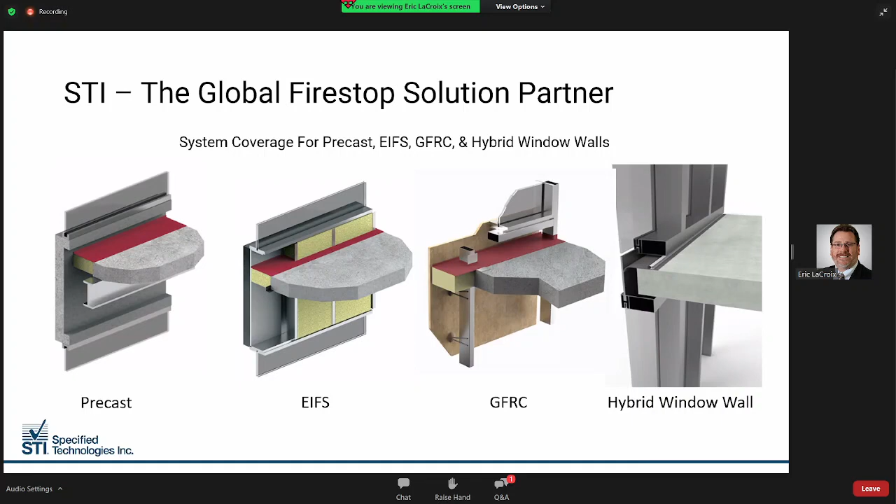STI has also invested in the development and testing of the industry's most successful products for perimeter fire containment, including water-based and all-weather high-performance fire stop sprays for perimeter containment, the Quick Clip system, which has quickly become the standard procedure for both shop and field installed non-backpan spandrel installation conditions, as well as the industry's first full-scale ASTM E2307 tested solutions for hybrid window walls and vertical notch systems using the revolutionary window wall gasket.

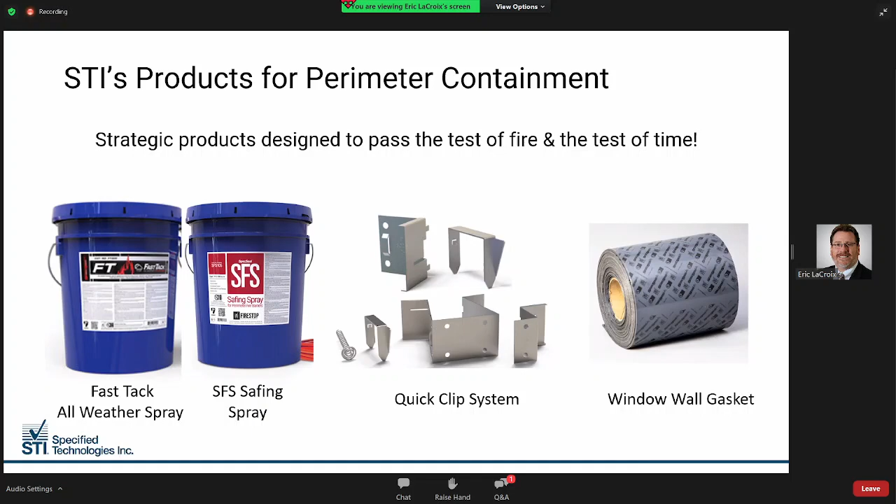But having the industry's best products, testing, and solutions isn't worth anything if you don't have the right people to support you. Because STI is 100% focused only on fire stopping, we can support market segments that have critical needs, including curtain wall and healthcare.

STI's curtain wall strategic team has over 45 years of combined curtain wall experience, providing you with unmatched field and office support from design and concept through installation.

And to support the strategic efforts for our partners, STI has complete sales coverage throughout North America, broken into 7 regions, supported by both regional manager with multiple territory managers covering the states or provinces in each region.

And last, our commitment to supporting our customers' needs is never ending. We offer the unmatched technical support from our engineered services group, which have over 250 years of combined experience through 2 U.S. offices, 6 days a week. Our goal is a 24-hour turnaround on engineered judgments and technical support so that you have the information when you need it.

This is a Book of Solutions designed to showcase the most cutting-edge perimeter fire containment tests for aluminum frame designs. It's easy to work with, so you don't have to search through over 140 plus tested systems, and is broken down by wall types, insulation attachment methods, as well as anchor types, covering back pans, non-back pans, all vision glass, short panel designs, hybrid window walls, anchor protection designs, and many, many more.

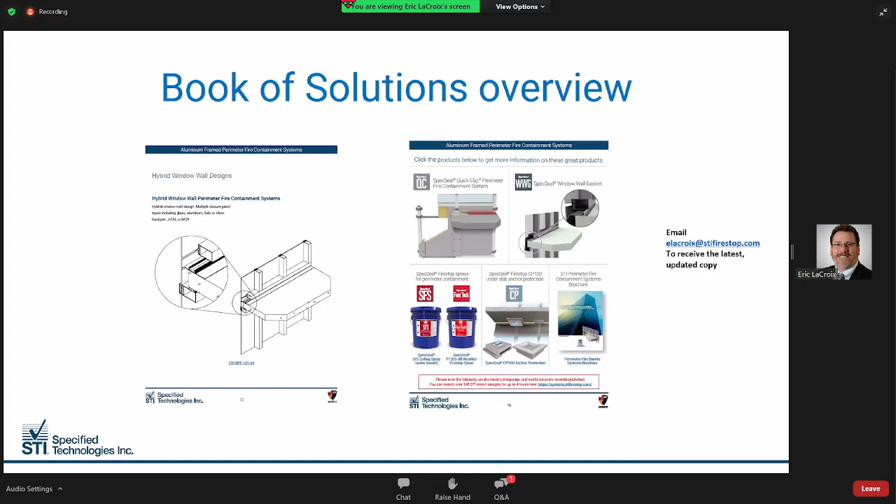And last, I'd like to share with you a very exciting advancement that we've introduced. We are always pushing the boundaries and have just released the new Design Assist service that allows you to easily and quickly interact with the curtain wall strategic team for all your needs.

You can access our new Design Assist feature off our website under the Solutions tab. Select curtain wall and scroll down the page, or you can easily email me directly and we will provide you with a link for all your project teams they can use. Many of our strategic partners have found this to be a tremendous value-added service and have had great success using this with their design teams for project support.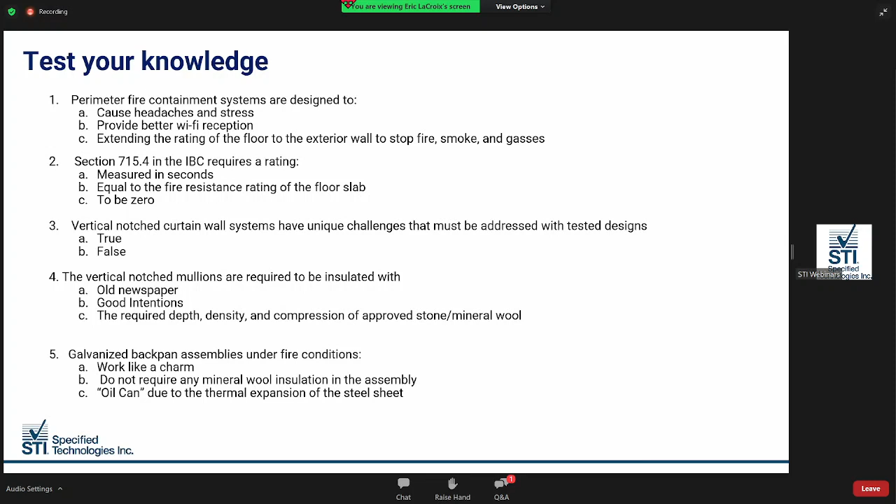First question: perimeter fire containment systems are designed to cause headaches and stress, provide better Wi-Fi reception, or extend the rating of the floor to the exterior wall to stop smoke, fire, and gases. Go ahead and make your selection now, and we'll move on to question number 2.

Section 715.4 in the IBC requires a rating. Is that measured in seconds, equal to the fire resistance rating of the floor slab, or is it to be 0? Go ahead and make your selection now. We'll move on to question number 3.

Vertical notch curtain wall systems have unique challenges that must be addressed with tested designs. Is that true or false?

Number 4, the vertical notched mullions are required to be insulated with... is it old newspaper? Good intentions? Or the required depth, density, and compression of approved stone or mineral wool.

Our last question, number 5: galvanized backpan assemblies under fire conditions. Do they work like a charm? Do they not require any mineral wool insulation in the assembly? Or do they oil can due to the thermal expansion of the sheet steel? I'll give you another second or two to make your final selections.

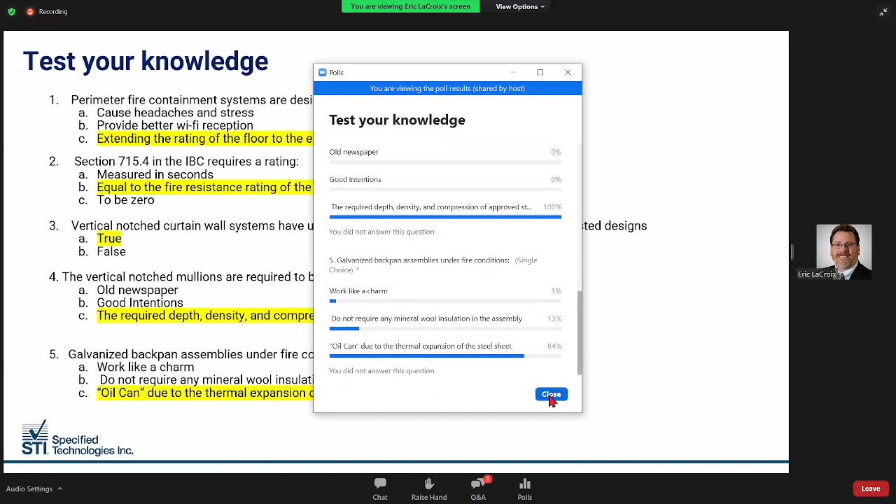Number 1, 100% of you got that one right. Perimeter fire containment systems are designed to extend the rating of the floor. Number 2, section 715.4 in the IBC requires a rating equal to the floor slab.

99% of you got that one right. Number 3, vertical notch curtain wall systems must be addressed with tested designs, and that is true. 97% of you got that one right.

Number 4, the vertical notch mullions are required to be insulated with... one person did choose good intentions. We love that person out there. But if you round up, 100% of them got it right: the required depth, density, and compression.

And number 5, galvanized backpan assemblies under fire conditions do oil can. 84% of you got that one right. Great job, 100% as a whole.